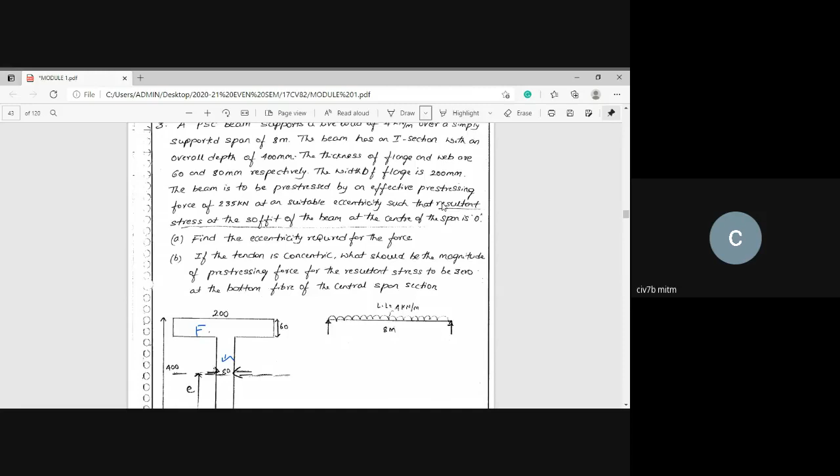Hence we need to go ahead with a different condition, or calculate this eccentricity in a different way. So the eccentricity, whatever we are going to calculate, needs to be done with this new condition. For that, we'll use the same approach as what we solved in the last class.

Sir? Yes? Sir, people are getting in. Can you please allow them, sir? They are waiting for your permission. No, I will not allow. This is a last warning. Okay. Okay sir, thank you.

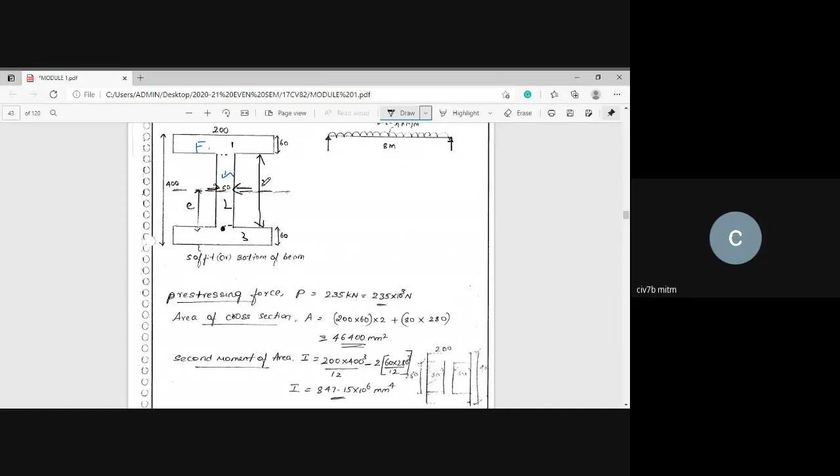Overall depth is 400 minus 120. How much will you get? 280 millimeter. So this distance is 280 millimeter. Now 80 is the width and depth is 280.

So 80 into 280, substitute in the calculator: 200 into 60 into 2, plus 80 into 280. Please, one of you keep on checking the answers. 46,400 millimeter square is the answer. Hope you get the same answer. Is it clear? Please check the answers in the calculator.

Next, we'll move on to the second moment of area, or moment of inertia. This is a very important thing, so please listen here. In the last problem, it was a rectangular section, and for a rectangular section we already know the formula.

For a rectangular section, the moment of inertia formula is BD cube by 12, that is B into capital D cube by 12. So here also we can use the same formula: moment of inertia I is equal to moment of inertia of the first section plus moment of inertia of the second section plus moment of inertia of the third section, and all three are rectangles.

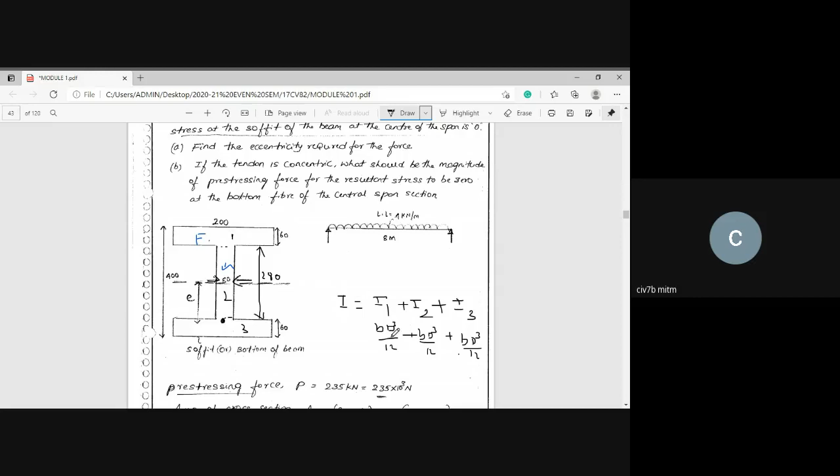So by substituting this, I will repeat: this is the first section, which is a rectangle, using BD cube by 12, which is the moment of inertia formula about the central axis. Hence B into D cube by 12 plus B into D cube by 12, okay, right.

Next, so this was the thing you used to follow. Okay, but apart from this, we also need to consider one more thing.

Okay, what I can say. Y1 minus y bar 1. Hope you remember your basic engineering mechanics class or strength of material class. Hope you know that, that is BD cube by 12, the moment of inertia of the first section plus, okay.

Then can you tell me the formula? Area of that first section, then y1 minus y bar whole square. So like that, same thing for a second section. Okay, like that we need to go ahead.

Is it clear? I think you remember this formula. Do you remember this formula? Do you people remember this formula?

That is, moment of inertia of the first section is BD cube by 12 plus area of the first section into y1 minus y bar whole square, plus moment of inertia of the second section about the central axis. Formula is BD cube by 12 plus A2 into y2 minus y bar whole square, plus moment of inertia of the third section, BD cube by 12 plus A3 into y3 minus y bar whole square. So like that we need to do.

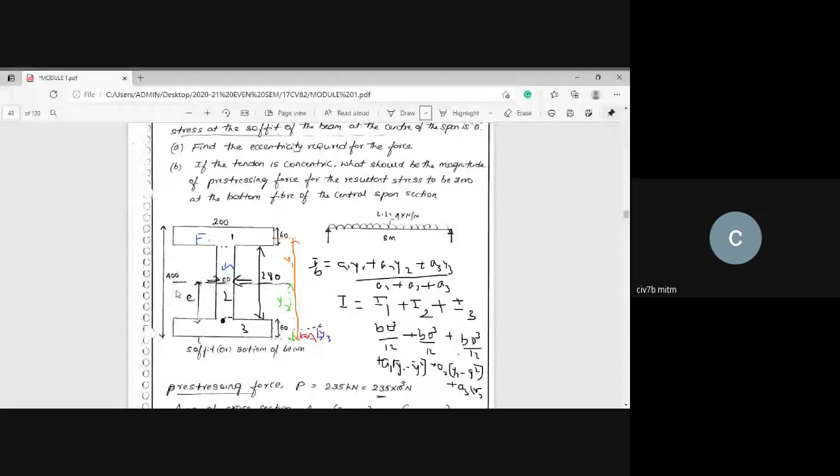With this, I am going to calculate Z. Since ZT and ZB are same, it is equal to I divided by YT or YB. If it is unsymmetrical, we need to calculate ZT and ZB separately, because YT and YB will not be same. So substitute moment of inertia divided by YT or YB, you get the answer in millimeter cube, that is 4.235 into 10 to the power of 6 millimeter cube.

That is 0.0464 meter square into 24, that is the density. Since density has not been given in the problem, you can consider 24 or 25. Better you solve considering 25. So now I have considered 24, I will proceed with this value only.

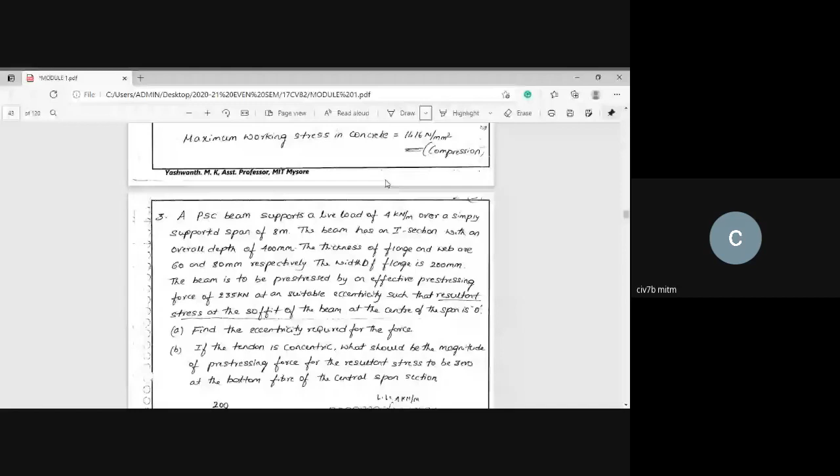And you already know what is the live load, the WLL or WL is 4 kilonewton per meter. So now let us calculate the moments. MDL is equal to, since it is always UDL and we calculate at the center of the span, WD into L square by 8. So WD is 1.11 into 8 square by 8, that is 8.88 kilonewton meter.

Next, ML equal to WL into L square by 8. The live load already given in the problem is 4 into, the span is 8, square divided by 8, so the answer is 32 kilonewton meter. So now all these basic parameters have been calculated: A, P, I, Z, WD, WL, MD, ML.

So now let us proceed with the condition. What we want now is eccentricity, by applying this condition. What is that condition? The resultant stresses at the soffit of the beam, at the center of the span, is 0. Let us write down that condition: the resultant stresses at the soffit of the beam is 0.

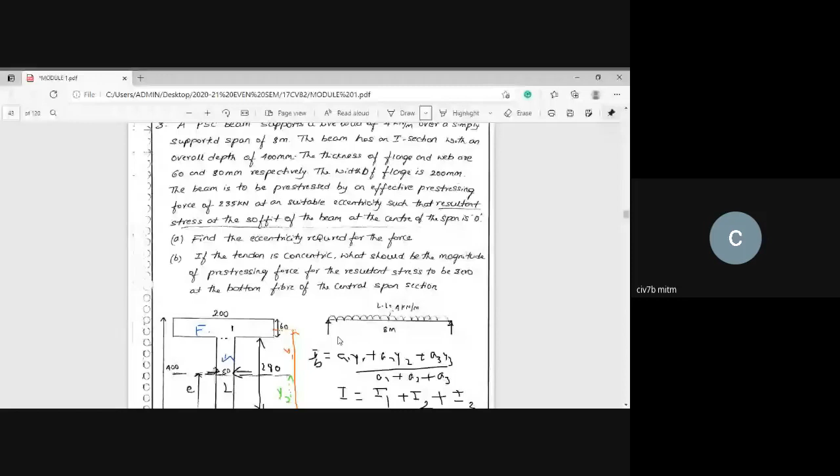At the last, so this is regarding this problem. If you have any doubts, you can ask. Sir, can you repeat once again self-weight of the beam?

Self-weight of the beam is cross-sectional area multiplied by the density of the concrete. So that means cross-sectional area they have given in millimeter square, convert that into meter square. That means divided by 10 to the power of 6.

So that will get you 0.046400. Whatever answer you have obtained in millimeter square, divide that by 10 to the power of 6. You will get 0.0464 into density of concrete is 24 kilonewton per meter cube. You will get this answer. Is it clear? Okay, sir.

Fine, so this is regarding a problem. Sir, last point, PE by Z is 0, sir. I think you are not listening to my lecture itself. Since E is 0, since the tendon is concentric, no bending stress will be developed. If you substitute E is 0, what will this terminology become?

So this is regarding the problem. Any other doubts? Fine, so let me proceed with the second problem.

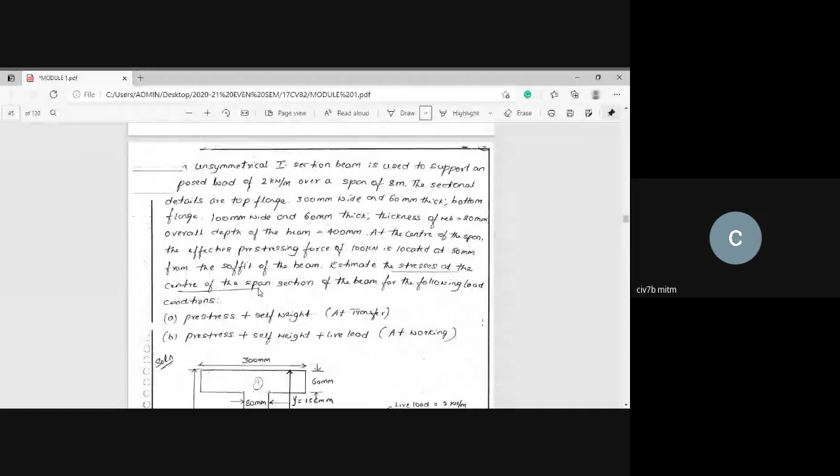Next, they have imposed, that is imposed load or superimposed load or live load of 2 kilonewton per meter, with a span of 8 meter. Okay, span of 8 meter.

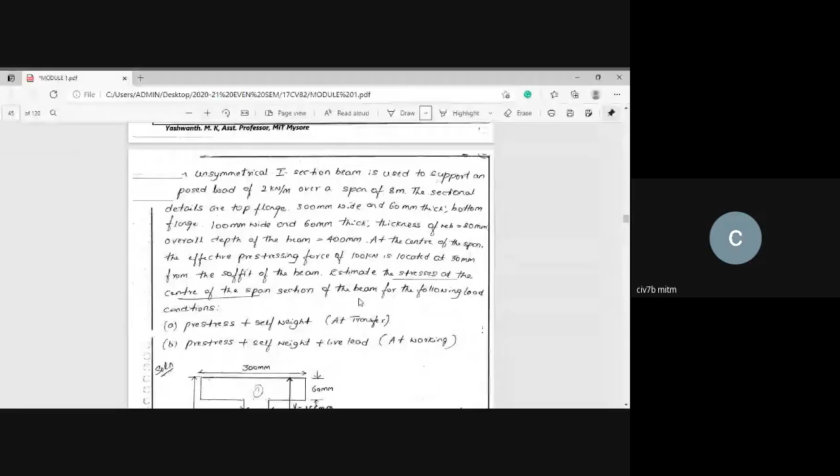Next, the pre-stressing force is acting at a 50 millimeter distance. Please note, the pre-stressing force is induced at a distance of 50 millimeter from the soffit of the beam. So at this particular distance from the bottom, the pre-stressing force is induced.

Next, estimate the stresses at the center of the span section, for the transfer condition. Please note, what is the meaning of transfer condition? It means the pre-stressing force will be transferred through the beam, that is, it is still in the factory. The pre-stressing force has been transferred and no external load has been subjected to the beam.

That is for transfer. In the examination, instead of giving these two, they may ask at transfer, at working. So you need to know what is the meaning of transfer and what is the meaning of working. Working means the same beam is subjected to external loads, so you need to consider the live load. Either way, in the examination they are going to ask this.

A very important thing you need to remember is they have been asking the stresses at the center of the span. In the examination, whatever problem they give, sometimes they will mention it as center of the span. If they don't mention anything, you need to calculate the stresses at center of the span only. Please note this point: unless otherwise specified, calculate the stresses at the center of span only.

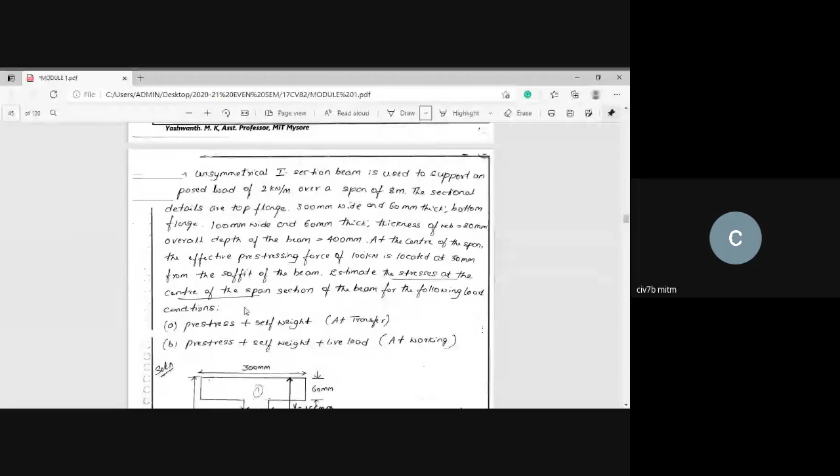So let me go ahead with the problem. This is the problem they have been given. As I stated, let us calculate all the basic parameters.

Let me go with the first, eccentricity. Eccentricity you cannot calculate now, it is not given in the diagram, because nowhere have they given the eccentricity. If you want to calculate the eccentricity, like in the first problem, they did not give the number of wires. Coming to the second problem, similarly, they have not given the conditions we used before. So how to solve? For the time being, don't calculate the eccentricity, go to the next step.

The pre-stressing force has been given, fine. Next, let me go ahead with the cross-sectional area.

Just like before, divide the section into 3 rectangles: number 1, number 2, and number 3. Please note, in the examination, apart from rectangles, no other section you are going to get, like semicircle, circle, or triangle shapes. Please note this point, only rectangles. So let us divide this unsymmetrical I-section into 3 rectangular sections.

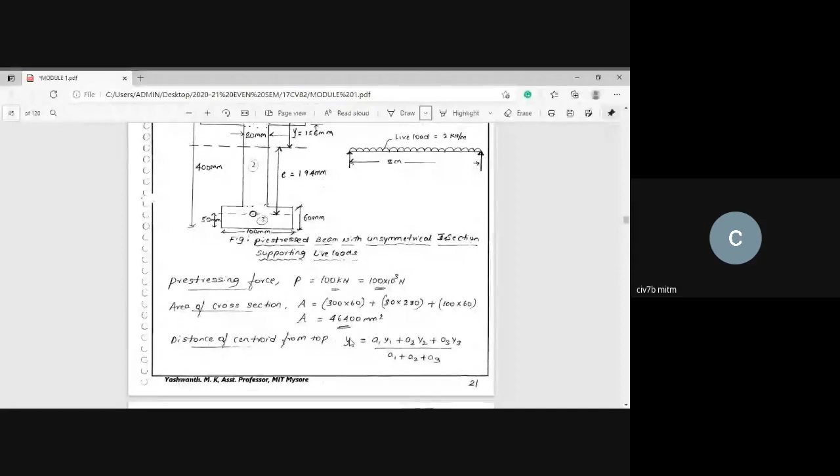Is it clear? Next, before calculating the moment of inertia, first calculate the centroidal distance. As I stated, whenever you calculate the centroidal distance, you need to mark the reference axis. In the earlier problem, I taught with the bottom as reference. Now let us calculate with the top, so let me consider this as the reference axis.

So what is the formula? Y bar top, measured from the reference axis, equals a1*y1 plus a2*y2 plus a3*y3, divided by a1 plus a2 plus a3. Same formula. Next, let me note what is a1. A1 is 300 into 60.

Fine, fantastic. So what is y1? Y1 means the centroidal distance of the first section measured from the reference axis. So this is your y1.

Next, let me proceed with a2 into y2. A2 is 80 into 280. What about y2? Y2 means, somewhere here, this is your y2.

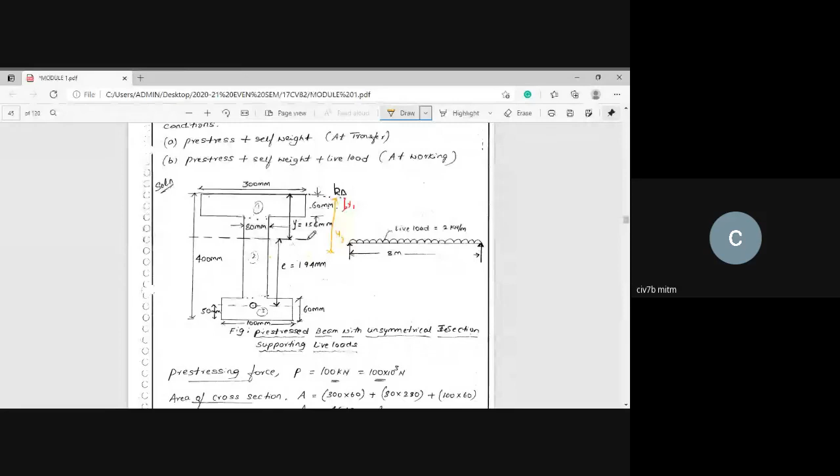So how to calculate y2? This depth is 280. 280 divided by 2, plus 60. Am I right? This distance is how much? 280, am I right? So 280 divided by 2, because it is a rectangle exactly at the center.

So 280 by 2. But y2 will be calculated from the reference axis, hence plus 60. Did you get my point? Have you understood? Fine.

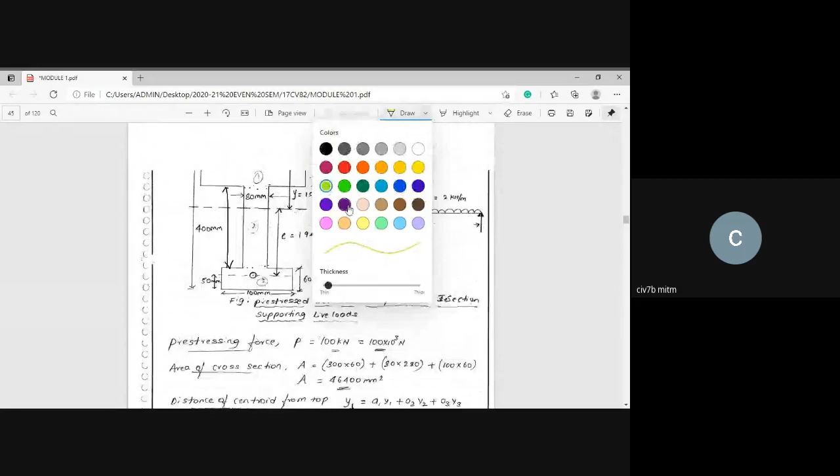Next, y3. Y3 is how much? Like from here, so this is y3. So that means the centroidal distance of this section, how much? 60 by 2, because it is a rectangle, exactly it will divide into half. But this should be measured from the reference axis.

Hence, I'm going to measure from here. That is 60 plus 280 plus 60 by 2. Am I right? I will repeat: 60 plus 280 plus 60 by 2. So that will give y3. So it will be how much? Almost I can say 30 plus 280 plus 60, that is 370. So that is your answer, 370.

So divided by A1 plus A2 plus A3. Substitute this, you will get the answer 156.03 millimeter. Please try to check the answer. So let me mark that as 156.03, or 156.

So from the top reference axis, it will be 156, because you need not to be scaled. You already know that if this is 200 and this is 60, somewhere between 60 and 200 it will lie, that's why I've marked here. You cannot mark exactly at the center. Please note this, all these are basic things you need to know. So it is 156, that will be your centroidal distance.

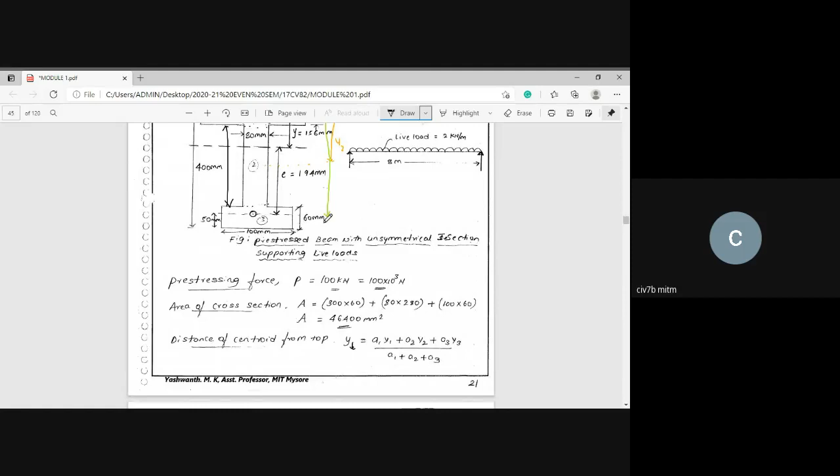140 plus 60 is 200, so that is y2. So 200 minus 156 whole square, plus moment of inertia of the third section, that is B into d cube by 12, same thing, B into d into y3. That means measured from the top reference axis: 60 plus 280 plus 30, so it will become 370.

Minus y bar 156, so we will get the answer 757.46 into 10 to the power of 6 millimeter to the power of 4. You can check the answer.

Next, sectional modulus. In the last problem, I was keep on writing ZT or ZB, because YT and YB was same. Now, YT and YB are different, because YT measured from the top is 156. This is YT. What about YB? How to calculate YB?

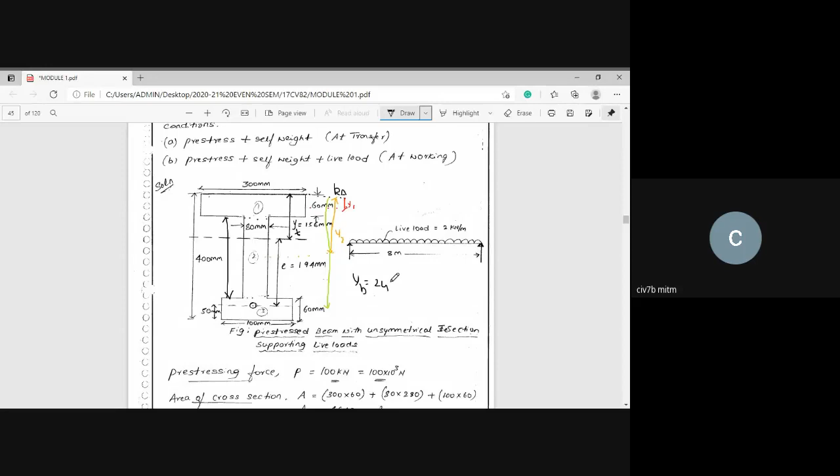350 minus, 400 minus 156. How much will YB be? So 400, 243, 244, so 243.96. If you consider it as 156.03, the answer will be 243.96 millimeter. So this is your YB.

Now let me substitute that moment of inertia divided by YT: substitute 10 to the power of 6 divided by 156.03. Moment of inertia divided by YB, that is 243.96. So be careful, you will get the answer in millimeter cube.

Next, once again, the dead load WD: cross-sectional area, which is in millimeter square, divided by 10 to the power of 6, into density of concrete 24. You will get 1.12 or 1.11 kilonewton per meter. And live load has been given in the problem as 2 kilonewton per meter.

So calculate the dead load stresses, same thing, WL square by 8, why? Because it's mid span, 8.96. Live load moment, same thing, WL into L square by 8. That is why it is WL square by 8, because you are calculating the moment or stresses at mid span. If you are calculating the stresses at mid span, you need to calculate the moment also at mid span, so WL into L square by 8.

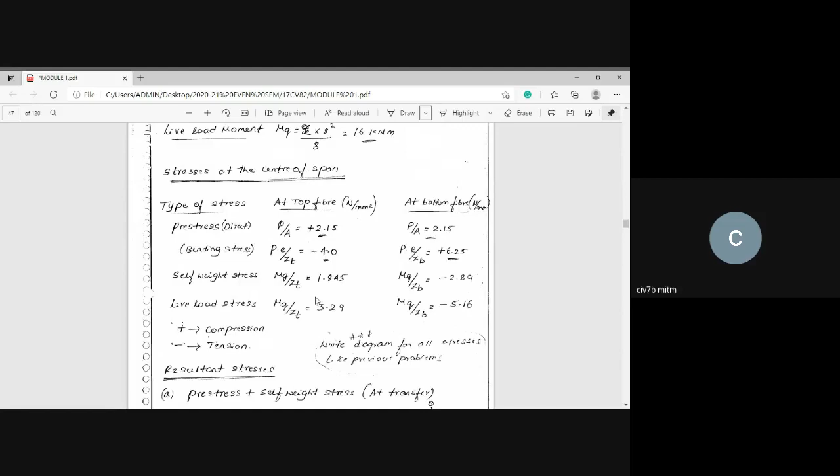Next, let me calculate all these parameters, or else you can directly substitute, however the way you can calculate. So now top fiber and bottom fiber have been bifurcated because both are different. So let me go ahead with direct stress, P by A, P by A.

Both are same because once the pre-stressing force is induced, as we know, top also P by A, bottom also P by A. Substitute that, you will get the answer 2.15, 2.15.

Now come to the bending stress at top, that is P into e divided by ZT. Please be careful, ZT and ZB are not same. It is negative because the compressive stress will be at the bottom, hence it will be positive here.

Next, dead load stresses: MD by ZT here, MD by ZB here. Why is it negative and why is it positive here? Because once the load has been subjected to the loads, it will create tensile stresses at the bottom, compressive stresses at the top.

Next, live load stresses, the same thing: 3.29 at the top and minus 5.16 at the bottom. You can see, positive indicates compression, negative indicates tension.

Now let me go with the condition. For the first condition, calculate the extreme stresses, that is, what is the F superior and what is the F inferior for transfer condition, that is pre-stress plus self-weight. So F superior is equal to 2.15 minus 4 plus 1.85. It will become 0.

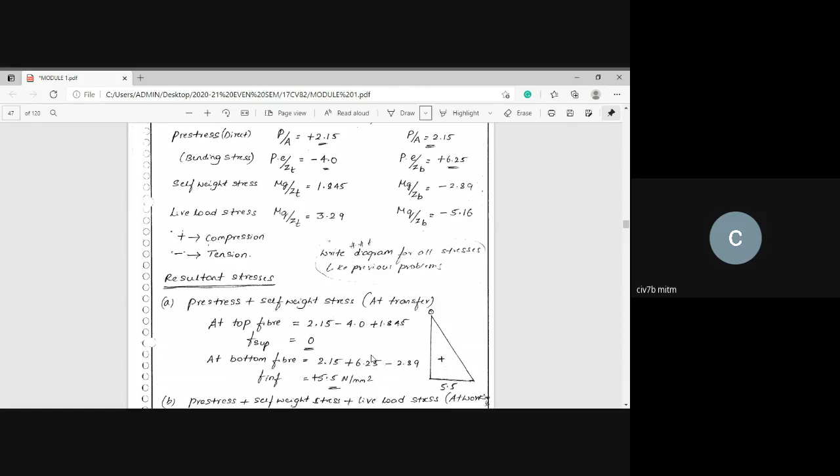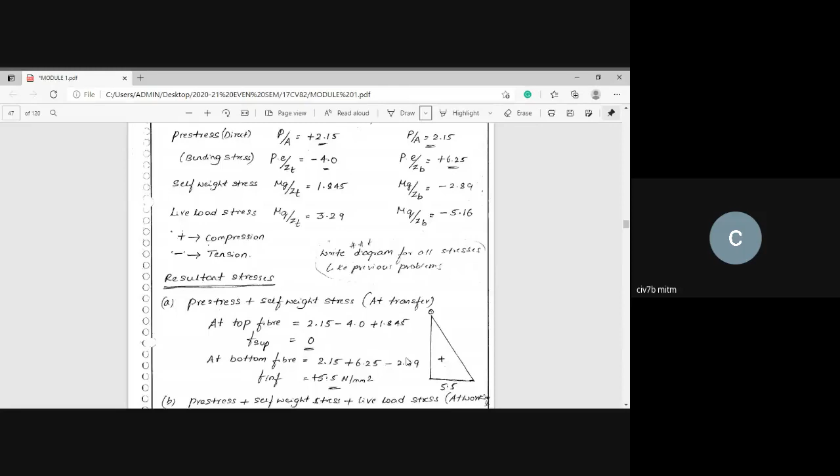Like that, at the bottom fiber: P by A plus Pe by ZB, then minus M by ZB, that is 2.89, you will get plus 5.5 Newton per millimeter square. Draw the beautiful diagram, so 0, 5.5.

Next, go to the second condition, working condition, that means live load consideration. P by A minus Pe by Z, plus MD by Z plus ML by Z. Substitute that, you will get 3.285. You can see all the parameters are there here.

Next, go to the bottom fiber. So in the bottom fiber, it will become positive and negative, negative, so it will come down to 3.285 at F superior and 0.35 at the bottom. So this is the way you need to solve the problem, to calculate the stresses for a mid-span section when they ask for transfer condition and working condition.

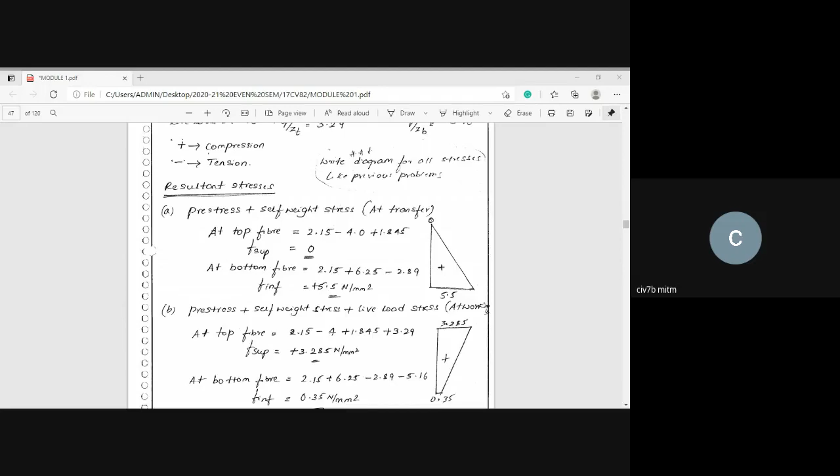So like this, we need to work out the...